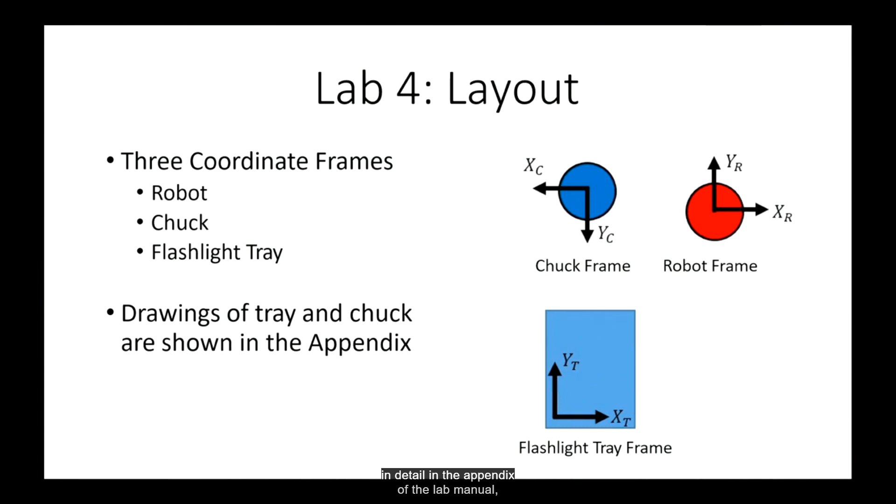So there are 3 different coordinate frames used for the lab: the robot, the chuck, and the flashlight tray. And this information will be more in detail in the appendix of the lab manual, which is going to be uploaded to Canvas shortly.

So this is just a suggested order for how you go about assembling the flashlight. You don't necessarily need to follow this order, but this will give you a good idea of what we found is the best sort of set of operations to assemble it. So you need to grab that flashlight head, put it in the chuck, close the chuck, and then you're going to be threading on the main body of the flashlight. You're going to be putting the battery assembly within that main body, and then you're going to be putting the cap to the flashlight and threading that on.

Now, we are using a new command in this lab, which is Tighten Torque. It's a function that uses the gripper we used in the last lab to tell how much torque is being exerted when you're threading your flashlight. So that can be a little finicky to get working, so taking the time to try to figure that out and get it working is going to be important. But that'll ensure that you've tightened everything properly without over-tightening it.

So the grading is going to be done taking into consideration a couple different things. Creativity is an important one. You're going to have the opportunity to make some kind of creative addition that'll allow your robot to function a little bit better or faster, or just improve the assembly process. And we're intentionally a little bit vague about what we want to see for that, because we want to give you guys a chance to really come up with your own ideas and creative things.

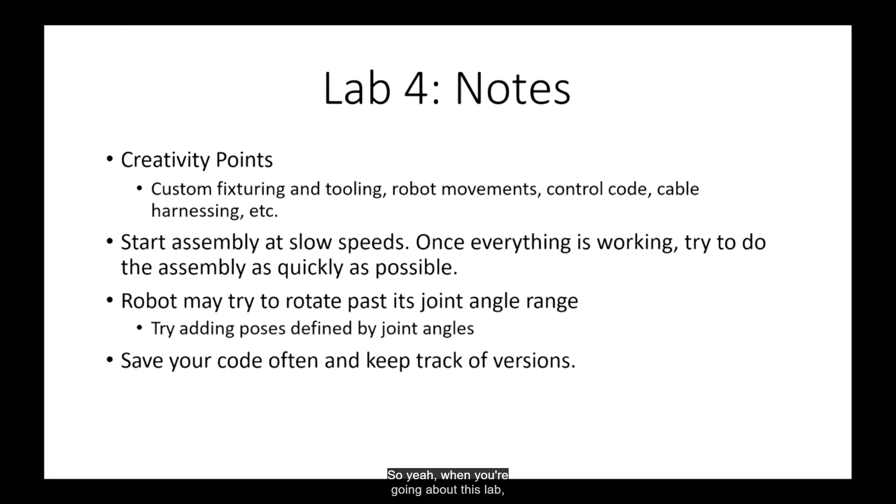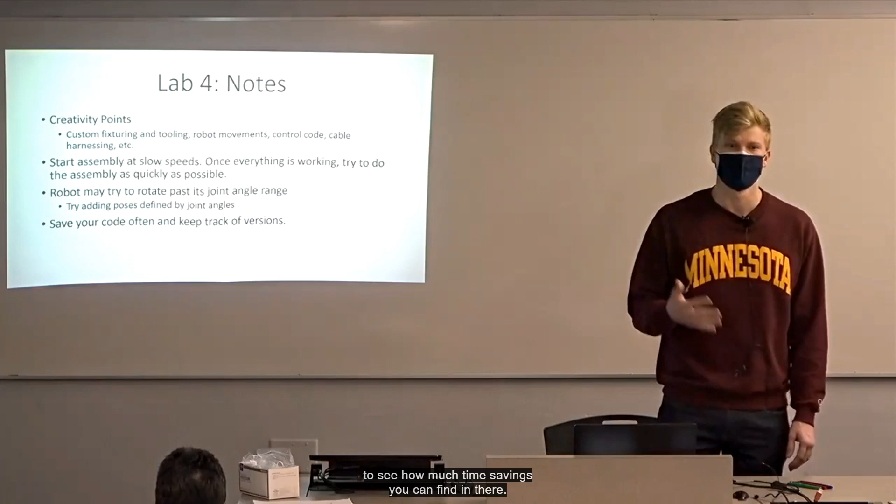So when you're going about this lab, what you want to do is break it up. The first thing you need to do is start assembling at slow speed. This will give you a chance to make sure that your full assembly is working before you start trying to speed it up and get it within certain time frames, because another consideration for grading is going to be how long your assembly takes. We're going to have a few different time breakpoints and points associated with that. So it's going to be important that you guys iterate through the code and try to see how much time savings you can find in there.

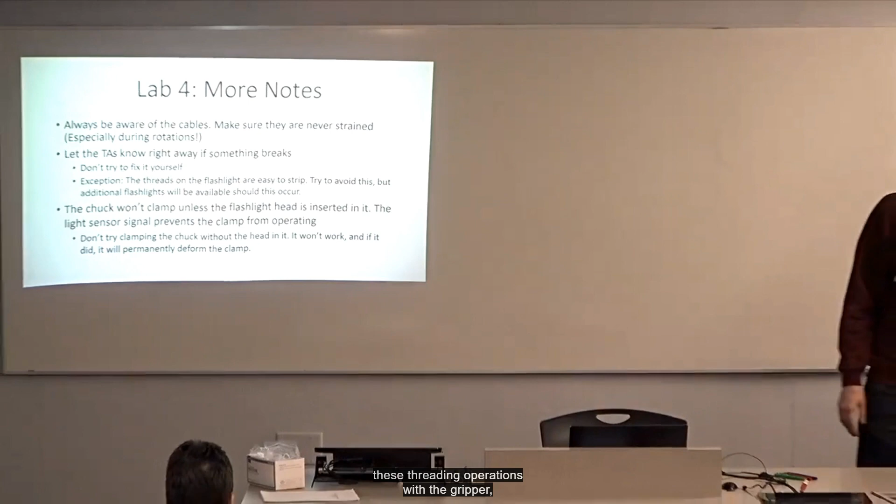So a couple more notes. Be aware of the cables, especially since we're doing these threading operations with the gripper. You need to make sure that you don't over-rotate the gripper and strain the cables that are attached to it.

And let us know as TAs right away if something breaks. The one exception being the flashlights themselves. It's really easy to strip the threads on them, so if that happens, we're going to have additional flashlights available for you guys to use and abuse. So that's good, but if anything else breaks, please just let us know and we'll come fix it, okay?

Another note is that the pneumatic chuck that I was talking about earlier, that's what actually clamps and holds your flashlight assembly in place during assembly. And it's impossible to actually close the chuck without the head inserted into there, because if it did, it would break the chuck. So we have a light sensor to identify if the flashlight head is actually in the chuck. I think there's a picture later in this presentation, so I can show you what I'm talking about.

Okay, so as talked about earlier, two big considerations in grading, outside of just actually having the flashlight assembly working, is going to be making sure that you do it as quickly as possible and try to hit the time targets that we're going to be setting for you guys. And then having creative additions is going to be important.

So, as I said earlier, focus on getting the flashlight assembled however long it takes, and then just slowly iterate through and try to cut time and improve the program.

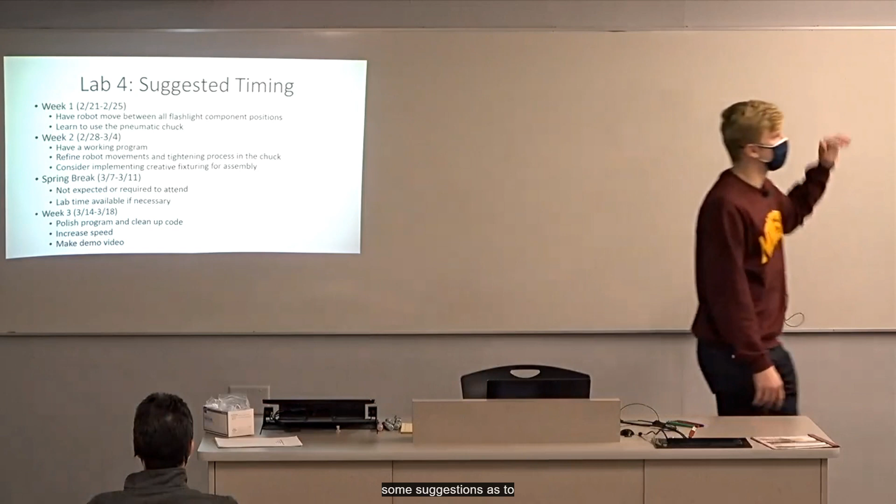So with that, we broke down some suggestions for you as to checking your progress week by week. Week one, you want to have your pre-lab coded and everything going, and then just try to get your program working as best as you can. Make sure that you have all of your coordinates updated and it's moving to the correct locations at the correct time. And start playing with the pneumatic chuck and the torque thread operations to really make sure you understand and can figure out how to use those.

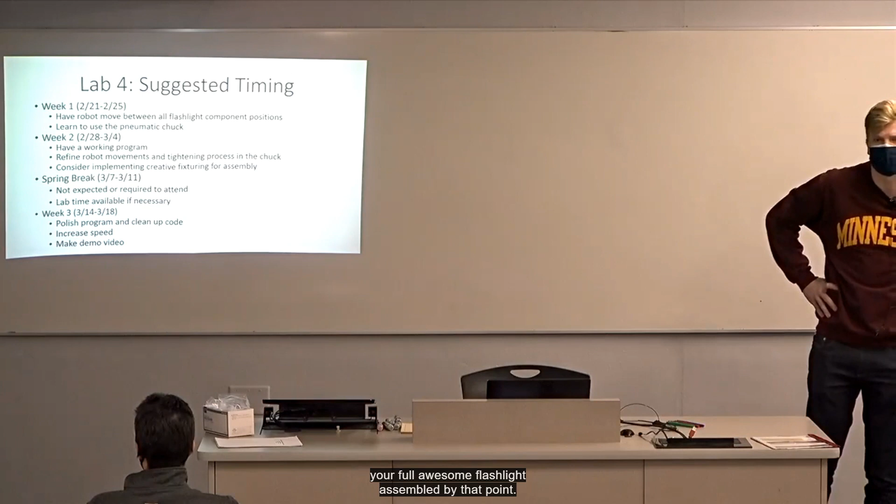Then week two, you should really try to have your full flashlight assembled by that point, regardless of how long it takes. You should start looking at implementing your creativity ideas at this point too, see what you can do. And if you have some extra time, just try to keep refining your robot movements.

As said before, spring break, there's no required lab, but the lab will be open if anyone needs that additional time. And then week three is when you're going to want to really take the time to implement your creative additions, refine the process, increase speed as much as possible, and then take a little bit of time to make your demo videos, because we are going to be requesting that you submit a full video of the flashlight assembly.

And I actually have that video here. So this is a video of my robot from last year assembling the flashlight.

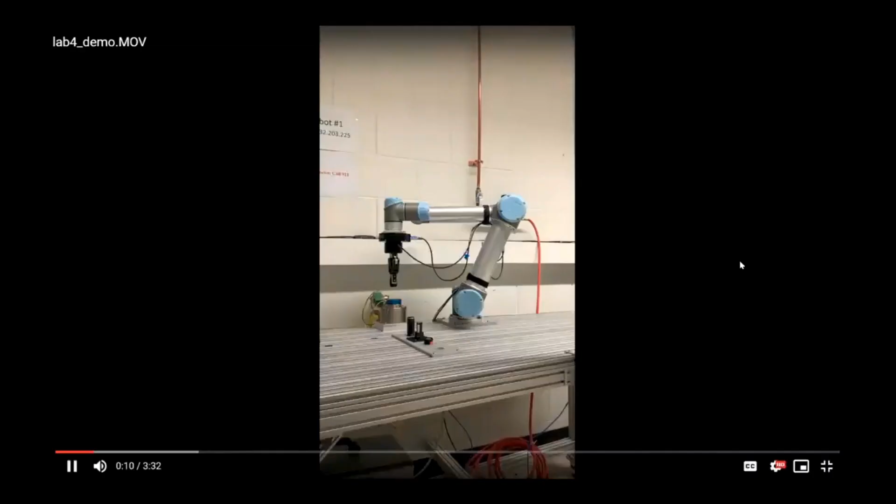So the video starts at the move home operation. It's where the time begins. This is as soon as you hit that move home.

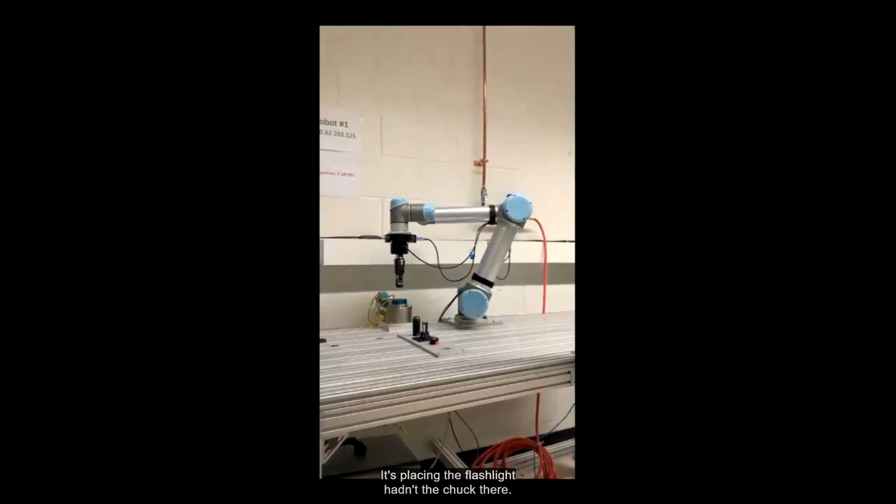It's placing the flashlight head in the chuck there. And then it closes the chuck now that the chuck realizes that there is something in there. Now we're grabbing the body and we're going to begin the threading operation for putting the body on the flashlight head.

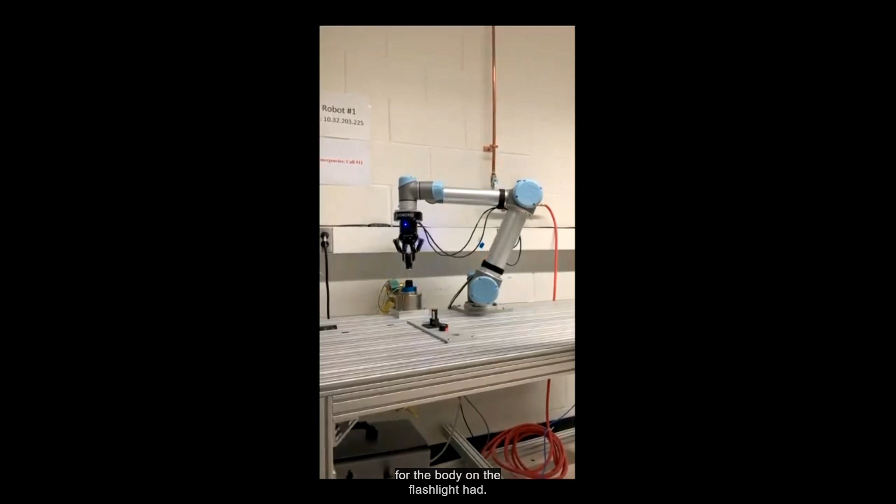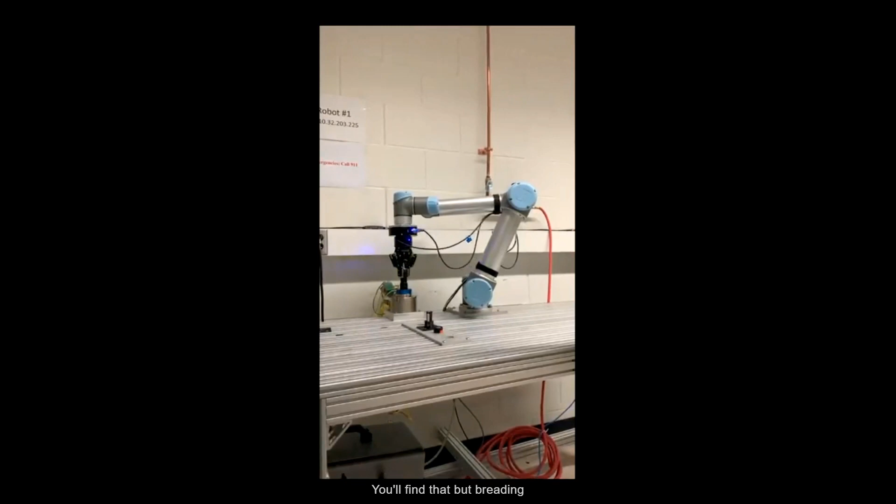You'll find that the threading operation takes quite a while.

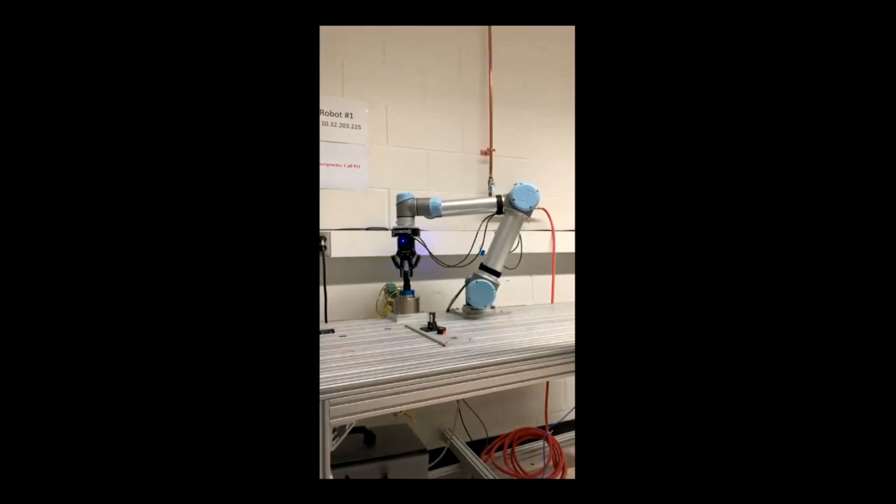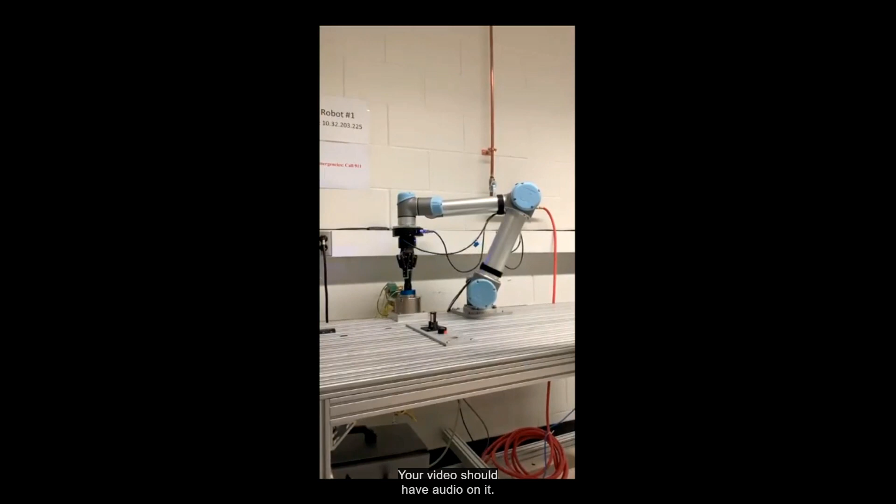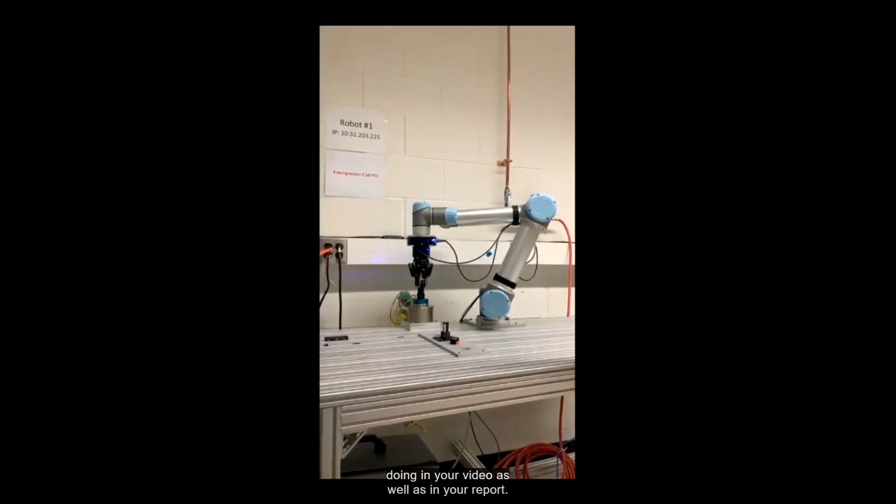Your video should have audio on it, and you should describe what is unique about what you're doing in your video, as well as in your report.

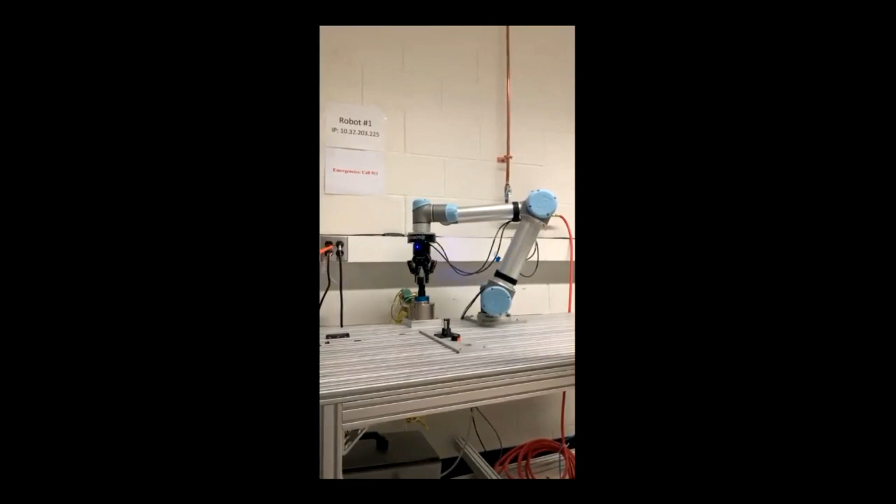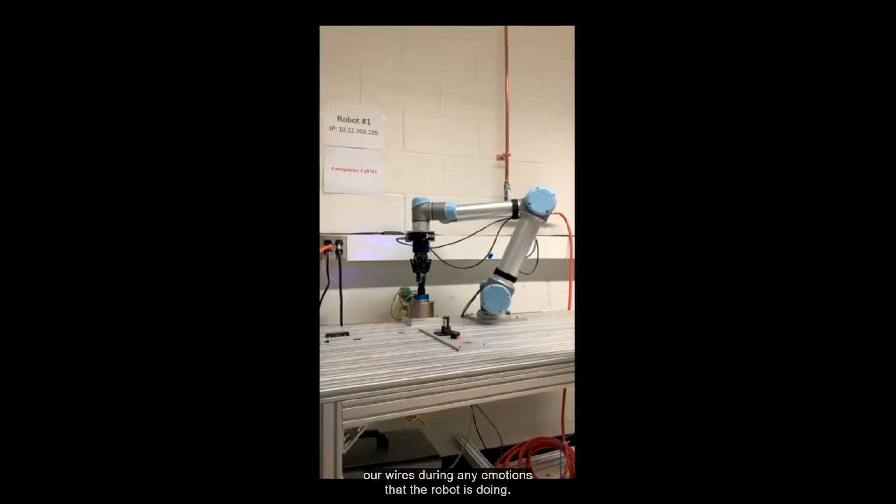Notice the dangling wires. You need to be very careful about not pulling out wires during any motions that the robot is doing. Yeah, that's why when you're threading, you need to turn it part of the way, then back it up and turn it part of the way. You can't just keep it rotating because of those wires.

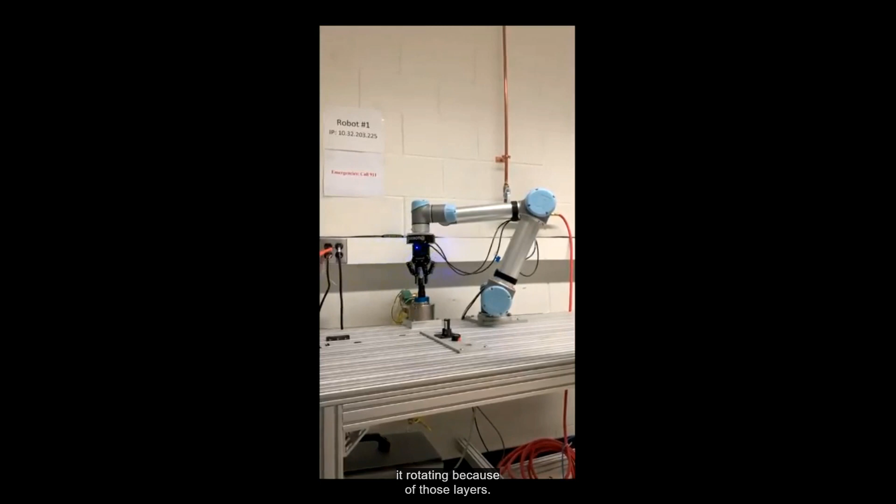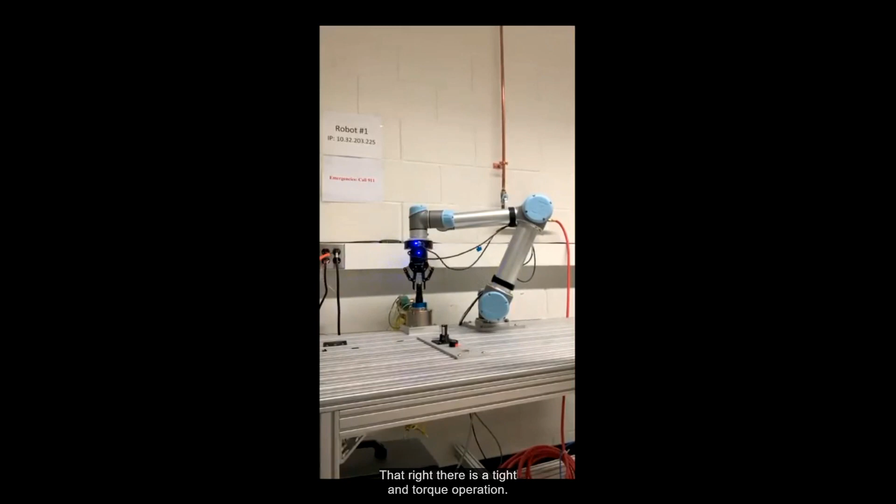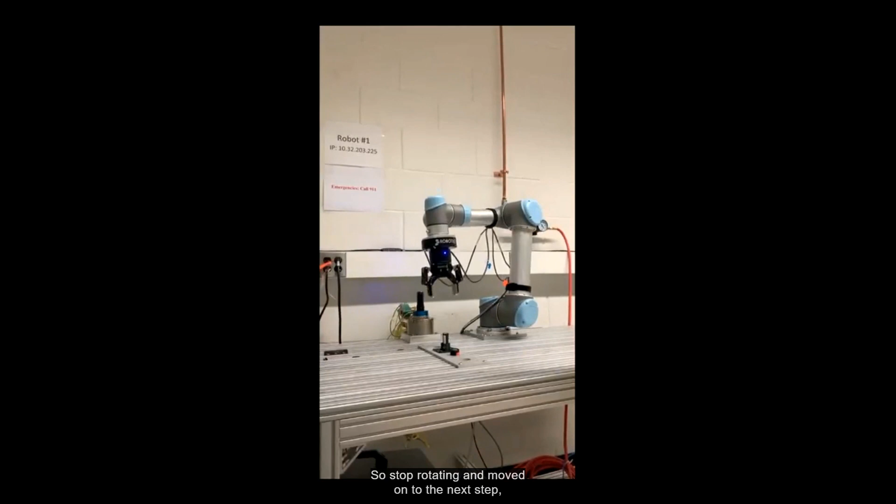That right there is a tighten and torque operation. So it found that it made it to the specified torque of 3 newton-meters, so it stopped rotating and moved on to the next step, which is inserting the battery assembly into the flashlight.

And then the final piece is the cap, which is another threading operation.

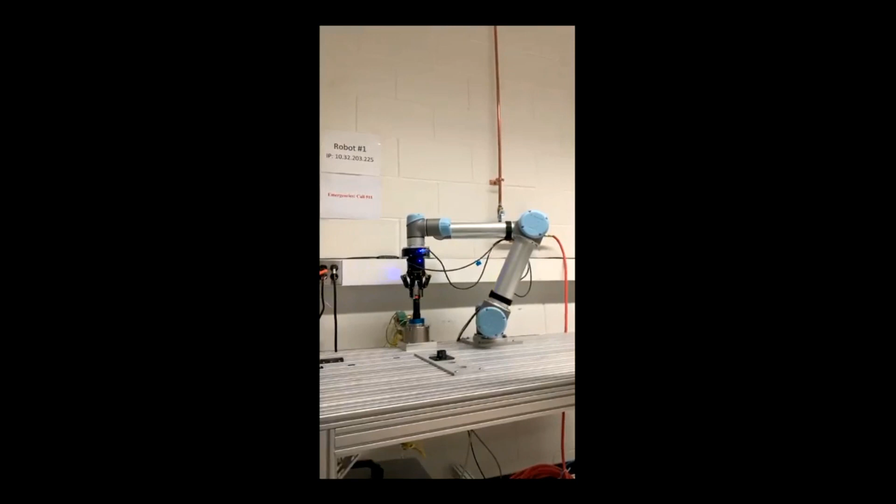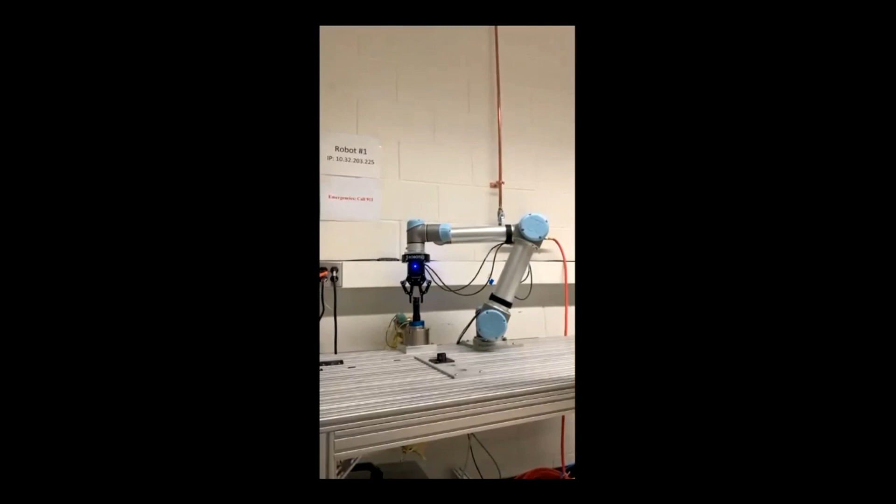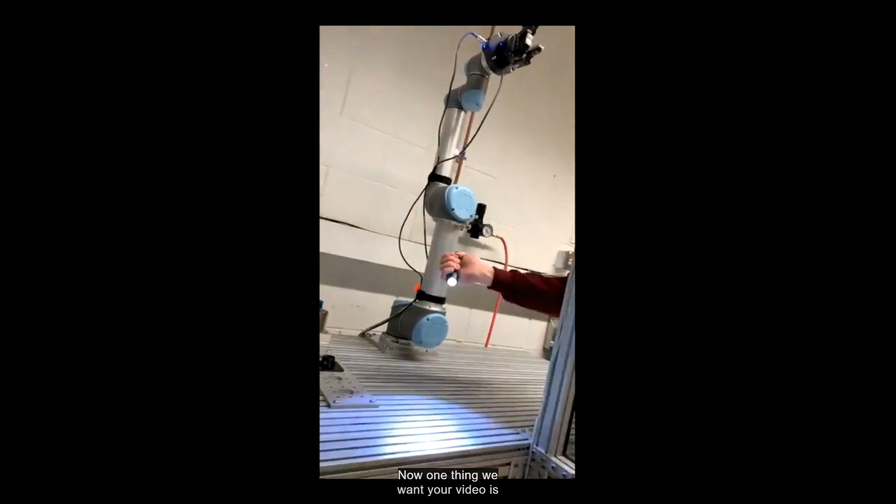Now the assembly is complete, and it moves home, and timing stops. Now one thing we want in your video is you demonstrating that the flashlight still works and is functional, and that you didn't break anything in the process.

As we just disassembling it to show that, hey, I didn't strip the threads, the flashlight is still there.

So deliverables: we want a full lab report. In the past you've been doing memos, but this will require a full lab report - abstract, introduction, methods, results, discussion, and conclusion. I believe we have a template or a guide available so you understand the requirements for a full lab report. We need to make sure we're identifying what the unique contributions are, both in the report and, as Dr. Donath mentioned, during your video of the flashlight assembly.

And then in the lab manual, similar to previous labs, there's going to be a number of questions that we're asking you guys to answer.

Now, put all of that in a zip file, upload it to Canvas: PDF of your lab report, all your robot files - that's going to be your RoboDK file, your Python, that sort of thing. And then, as I showed you, a video of the assembly with commentary describing what the robot is doing and what the unique or creative aspects of your assembly are.

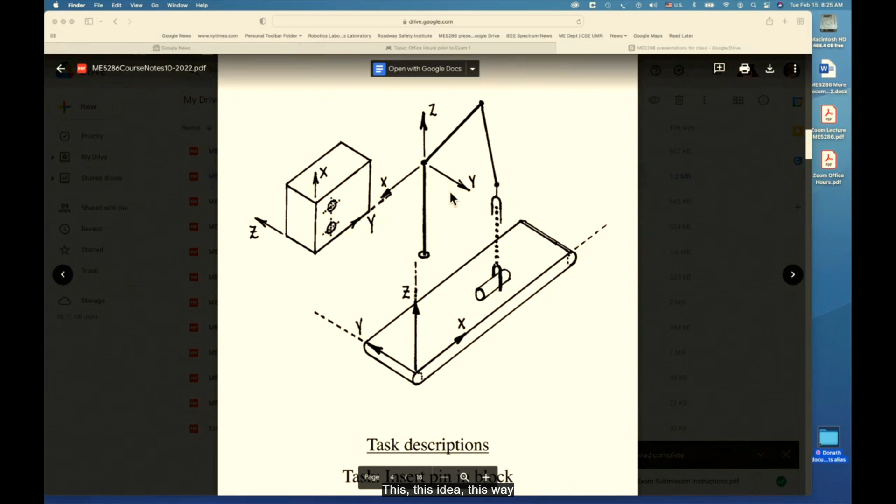This idea, this way of breaking up the task into steps and homogeneous transformation matrices, becomes very important. And it doesn't matter which robot you're using - they may call the position and orientation a pose, they may call it a target. There's all sorts of different nomenclature, different words used to represent what we're talking about here. So we're going to talk about a task, and the whole point behind this exercise is to set up the equations so that the robot controller can solve them and thereby create a sequence of motions of the robot end effector that will meet the task at hand.

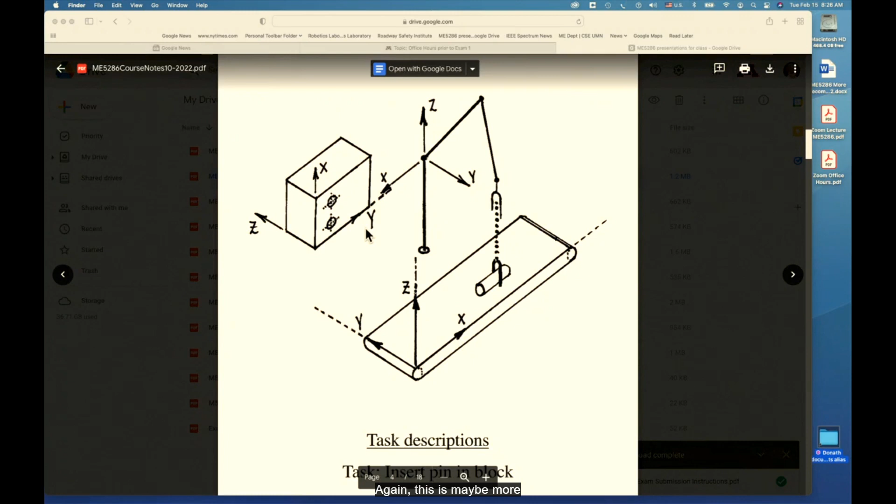So in this particular case, again, nothing magic about a pin, but it happens to be a pin. It's on a work surface, on a table. There's a coordinate frame on the table or the conveyor belt, and essentially there's an end effector. It's going to come down, grab the pin, and then swing it around and move it into a hole which is identified with respect to a block, and they each have different coordinate systems. Again, this is maybe more complicated than some tasks and maybe less complicated, but it's just illustrative.

So we're going to generate what I will admit to you is many more transforms than you may need for a particular task.

The point here is so that you see all the elements and how they come together. We haven't come to that step yet, but we will be able to group certain combinations of homogeneous transformation matrices and give them a name, and you'll see how that name plays a role later on.

The world coordinate system, the base coordinate system, whatever you want to call it, is identified by O or 0. Then there's a homogeneous transformation matrix that points to the coordinate system of the robot, wherever it is. Every robot has its own favorite place for its coordinate system.

T6 is going to be a very important element in all of this. T6 is a 4x4 matrix, and that matrix identifies where the flange of the robot is, where the end is, where you attach end effectors. It tells us where the end is sitting out in space.

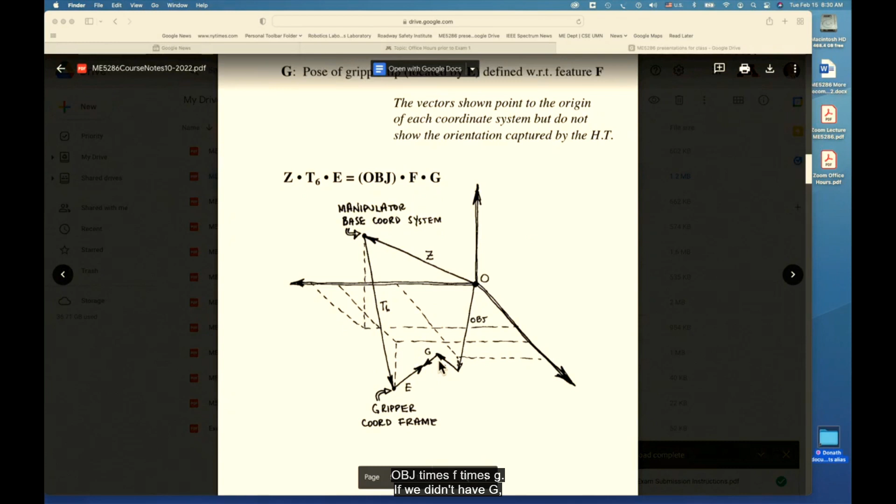So G allows us to form this equation that says that each of these is a 4x4: Z times T6 times E is going to be equal to OBJ times F times G. If we didn't have G, then where on the feature would we be attaching? Where would we be pointing with this E?

So let's now put some more specificity into this definition. We're talking about moving to a position over the pin. Let's call that P1. We are approaching the pin from overhead. We've talked about that before.

Then we're going to close our fingers around the pin and lift it vertically from the surface. We're going to move it above a hole with the pin oriented along the hole, and then insert it, sliding it into the hole. We'll let go of the pin, and then move the gripper away from the pin. That's essentially the sequence of tasks we're going to go through right now.

So we're going to have to define a whole bunch of homogeneous transformation matrices. One is the pin's coordinate frame—I'm basically reviewing what I talked about the other day. P is the pose of the pin in the base coordinate frame. B is the block's coordinate frame, again in the base, the O coordinate frame.

There's going to be the hole. There may be 10 holes, 4 holes. So this is going to be the ith hole with respect to the block.

PG is what we're going to spend some time talking about, and it's going to be defined by E. This is essentially the approach above the pin when we first arrive. PD is a departure above the pin. This is an approach above the hole where it's aligned with the hole, and then we push it in—that's the pose of the inserted pin.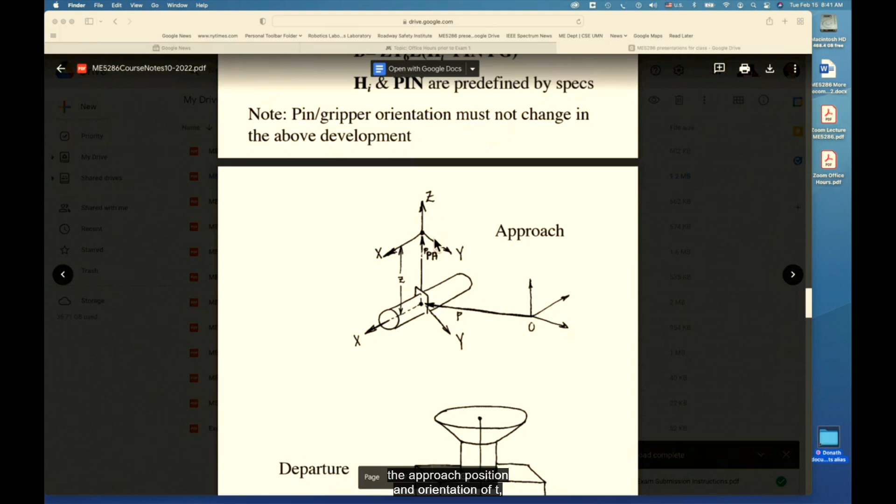So again, assuming that PA is going to be a position above P, very simple definition. It's just an identity matrix because it's just offset from the original P by a distance Z, which you can see in this diagram. Here is P. Here is x, y, z associated with P from the base coordinate system. And just going straight up by whatever distance Z, we're going to define the approach position. Keep in mind it's a pose. It's the approach position and orientation of PA.

Okay, so this PA is just offset by Z. So this is a very simple homogeneous transformation matrix. We're not asking for any change in orientation. We're simply applying an offset in the Z direction. If you want a departure point, which is often Never Never Land, if you don't want PA and PD to be the same, and you have some reason that PD should be something different, you can just set up your equation again. ZT6E, again, is the product of three homogeneous transformation matrices.

It's going to be equal to P times the departure position, which is relative to P, times PG. And all we have to then do is pre-multiply both sides by the inverse of P and post-multiply both sides by the inverse of PG. That's what you see over here. And that will get us to calculate PD. So again, once you've moved it around to where you want it, you can capture what PD should be.

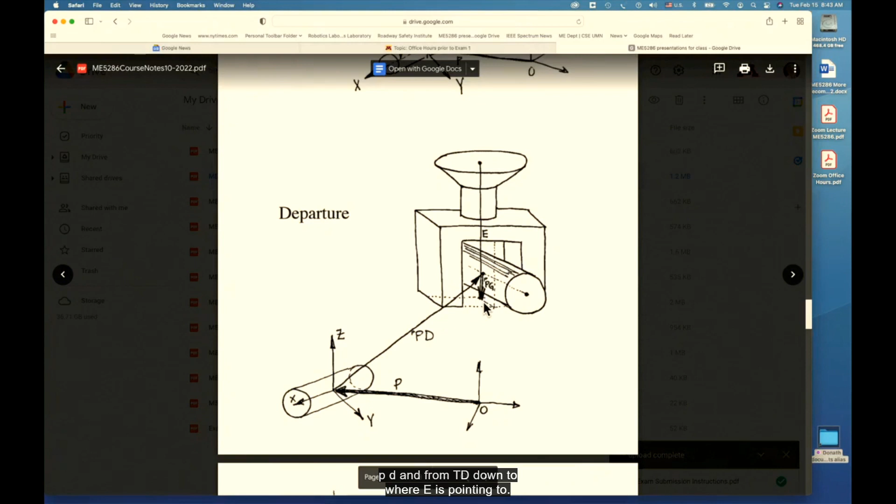And if we look at the diagram, here's the gripper, here's E, and some arbitrary place that you want that pin to go to after it's been on the table, was defined as PD relative to P. But then notice here is E, which is attached to the gripper, and that points down to here. So here we have E, which is attached to the robot itself, and PG is basically, think of it as closing the loop. It points to the position and orientation of this point, but relative to P. So we're going from P to PD, and from PD down to where E is pointing to. So there's an orientation and a position at this particular location.

It can get more complicated because as soon as we have a block B, where is B in this world? And then I'm just going through the steps so you get some sense of how this all plays together. If there was a block and there's a hole with respect to the block, so H is with respect to B, and then there's some insertion point inside the block, which is relative to the hole. And then we still have a PG to close the loop with that E over there so that PIN and E are essentially closed up.

So to calculate B, we're going to post-multiply ZT6E by the inverse of H sub I multiplied by PIN, that's the insertion position relative to the hole, times PG. In other words, we put a bracket in front of HI and after PG, take the inverse of that, then pre-multiply this side and post-multiply this side to get what B is.

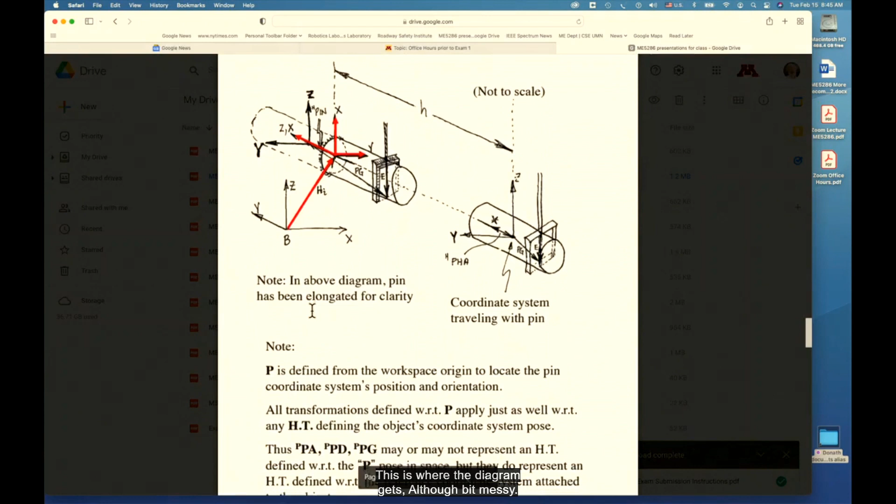So let's take a look. This is where the diagram gets a little bit messy, and again, I'm blowing things up dramatically so you can see the various elements.

We've got the block coordinate system over here, and H is a homogeneous transformation matrix that defines the coordinate system of that particular hole. That's this red - I'm just drawing the orientation, y in this direction, x in this direction, and z in this direction, representing the hole's coordinate system relative to the block.

So again, Z is going - always right-hand rule, you can put your fingers along the X and Y, and Z goes into the hole itself.

And then we have this pin. Initially, if I have a block, just imagine a block on this tabletop, and here's the pin - before I start, I am going to take that pin and manually put the pin into the hole to the right insertion point, and then bring the pin down and grab it where I expect to be holding it. So now I know where it's ultimately going to end up inside the block.

So essentially what we're going to see, notice PIN with respect to the hole - that's essentially how deep I'm going to be inserting the pin with respect to the coordinate frame of the hole. Notice that the XY plane is on the surface of the block, and PIN is going to basically just be a certain depth into the hole with respect to the XY plane.

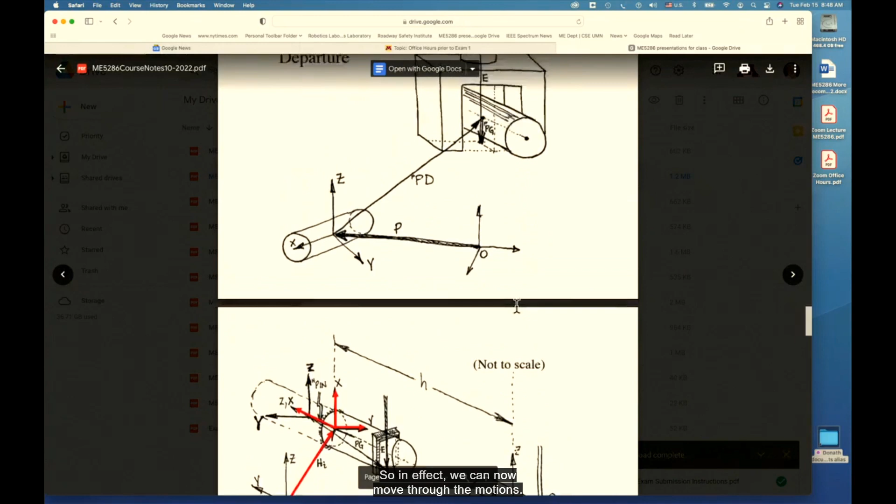So in effect, we can now move through the motions. Once we have this set up, we can essentially work our way, given all the appropriate approach points of PA with respect to the pin, PD, PG, but we also have now the PHA and PIN that we add to the mix.

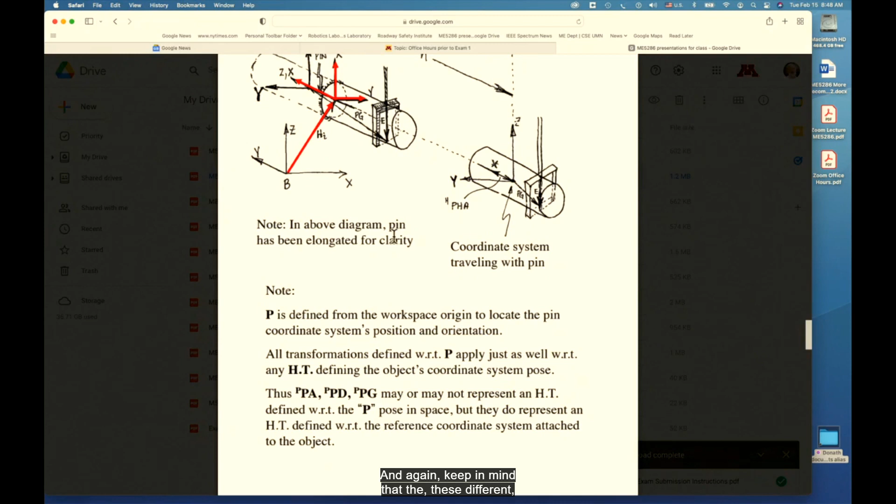And again, keep in mind that these different A's, B's, H sub i's are homogeneous transformation matrices. They are not just vectors, and so I'm not drawing all the coordinate frames you see here.

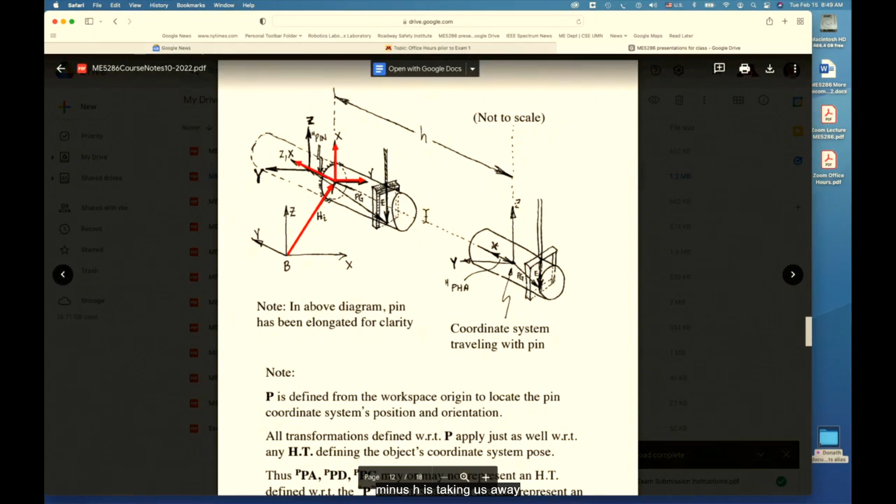So PHA is defined over here, and there's the minus H. That means it's offset from the hole. Remember, PHA is with respect to the hole by minus H. So we're going minus H because Z is going into the hole - minus H is taking us away from the axis of that particular hole.

So this is the task, and whoa, you're going to see all these matrices coming up. We're going to group some of these matrices soon, and they play a very important part in your typical program for writing out a program internal to the robot controller. You as the user of the robot are never going to see this - it's captured in the syntax and on the tablet that controls the robot, or the code that you're writing. You won't see all this detail, but I'm writing it out so you see the steps that have to be captured inside the robot controller.

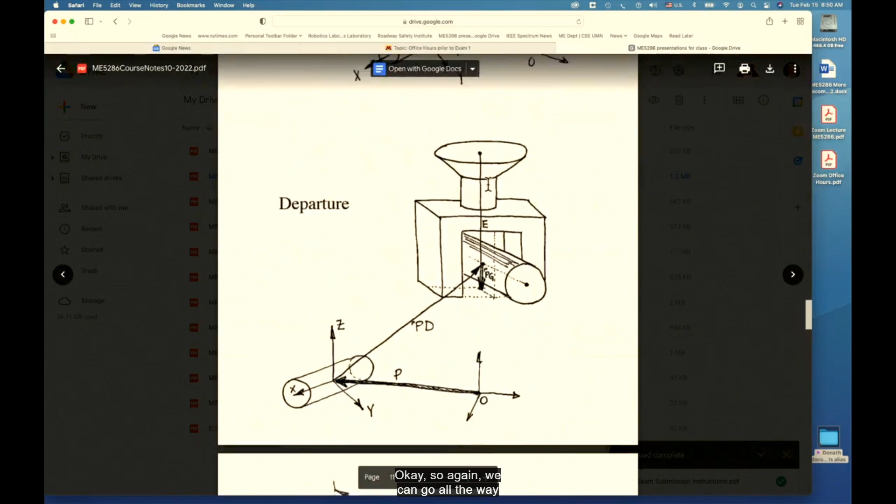So remember, the first position, we're really moving to the approach point above the pin. Okay, so again, we can go all the way back to show all the closures going on.

We're going back to all these steps, and we're capturing now all these parameters that we've introduced. But this time we're laying it out step by step. So now this is where we move to pin P1, which is at the approach position and orientation above the pin.

Now we're going to essentially move down to the pin's coordinate frame, which is sitting on the table. We close our fingers around the pin, then move away from the tabletop to a departure position, again somewhere above the surface of the table. Then we rotate around to a new position, which is the approach position and orientation above the hole, with respect to the block.

And again, PG and E inverse travel along with it, because otherwise we don't have an equation. Then we're going to insert the pin. We move into the block to PIN, the homogeneous transformation matrix inside the block, which is defined with respect to H, which is defined with respect to the block. Then we let go.

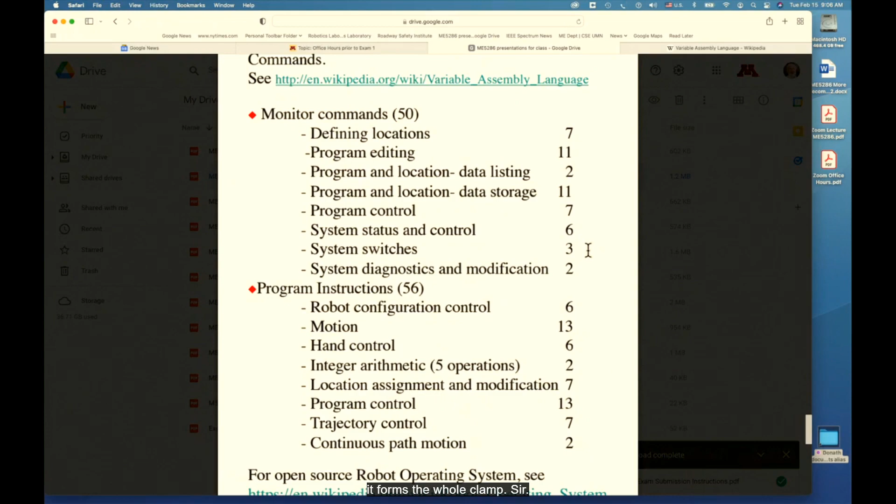For example, in the assembly of that flashlight, you really want to make sure that you don't clamp on the flashlight head unless there is something inside there, because I can't tell you how many clamps we destroyed, since if it doesn't have something to clamp on, it deforms the whole clamp. I had a previous teaching assistant, going back 3 years ago, who bought an LED photosensor, drilled a hole on the side of the clamp, inserted this LED photodetector, and designed a program so if there's nothing in it, that LED will prevent the clamp from turning on. There are solenoid valves that have to turn on in a certain sequence, and if that LED doesn't detect the presence of something blocking the light, it won't allow the clamp to close, so the appropriate solenoid valves are triggered.

So that might be something called system status and control, system switches to turn things on and off. And there needs to be a way of diagnostics to know, hey, what was going on here? Can I actually see what each motor was doing, or what each joint is doing? What was the joint velocity here or there? Today we have a wealth of opportunities to evaluate and test because you are writing the Python program that's doing a lot of this.

You are not using the raw commands on the teach pendant of the UR5, which I don't find to be a really good human interface for programming robots, to be honest. But the bottom line is it represents one mechanism, one approach to how users of the UR5 use the teach pendant to set up a series of targets, and they basically go from target to target.

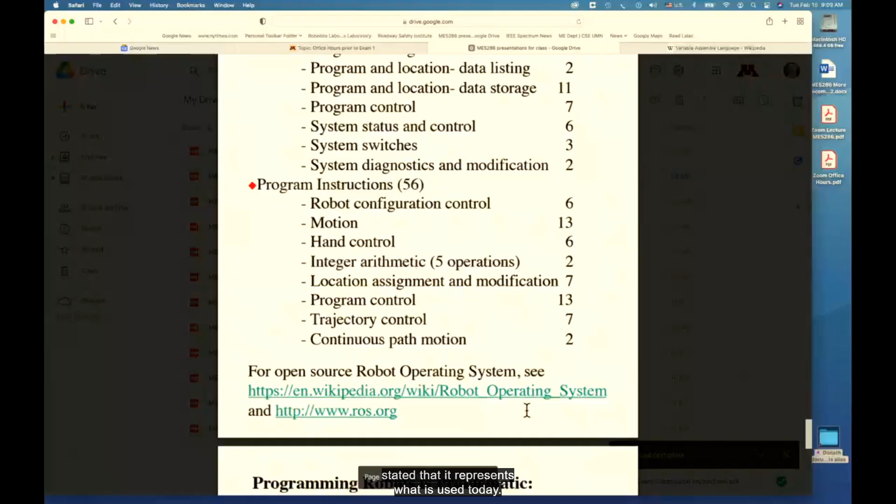Again, I don't want to go through all these different steps. You're not going to use this robot ever, so there's no point. But in this world today, probably, should I say it's the state of the art? It represents what is used today.

The robot operating system is a generic system for programming robots. Because it is so broad and so wide, it has so many things in it. It takes forever to really get a good handle on it.

It's been around for a while. Originally developed by Willow Garage, which is a company that doesn't exist anymore. I don't want to go into all the details, but it's stored in GitHub. GitHub, how many people—all of you should have heard of GitHub by now—essentially a classic place to put stuff which can stay theoretically forever, who knows.

But the point is, ROS is one environment, but it is so big and so monstrous it takes forever to really figure it out. So you need to be very careful about using ROS, and you really need to understand it to take advantage of it, because the neat thing about ROS is there's code that you can reuse. If you find code in ROS, it's open source, you can take advantage of it and use that piece of code for your particular application or development. So you have to understand its purpose, really, so you don't have to reinvent the wheel all the time.

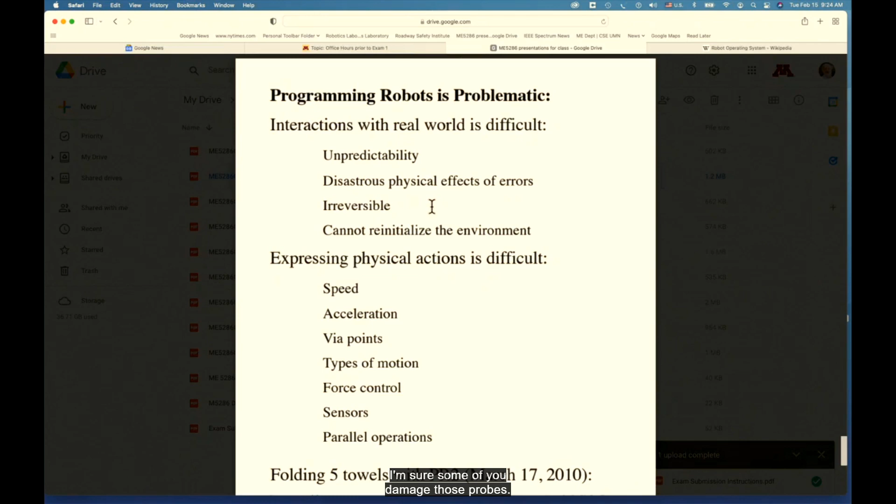I'm sure some of you damaged those probes in some sense. I don't know, but I can guess it happens. In our world, we've designed it so we can replace the probes, but there may be parts of the robot that aren't replaceable or can't go back to the pristine shape they were in before. These are all issues when you're dealing with the real world that don't exist in a simulation.

In a simulation, you can reset all your initial conditions to zero, and boom, you can start again. In the real world, that doesn't happen. We need to take into account the speed, how fast things are moving, their acceleration. We're going to have to create via points.

I'm sure when you start working with the UR5 for assembling that flashlight, depending on where the robot end effector is, you might have to add some via points because of the singularities of the UR5. As you saw a few lectures back, it has some really unusual singularities, unusual in the intuitive sense. You really have to look at that robot carefully to figure out where those singularities are.

Intuitively, you wouldn't guess you were running into a singularity until you try it, and then you'll have to go back and ask why it got stuck there. I didn't expect it to get stuck there. So you're going to have to think, maybe go back and look at those singularities in the lecture from a few lectures back and say, I better move it here so I can still get the robot to do what I want it to do while it's assembling.

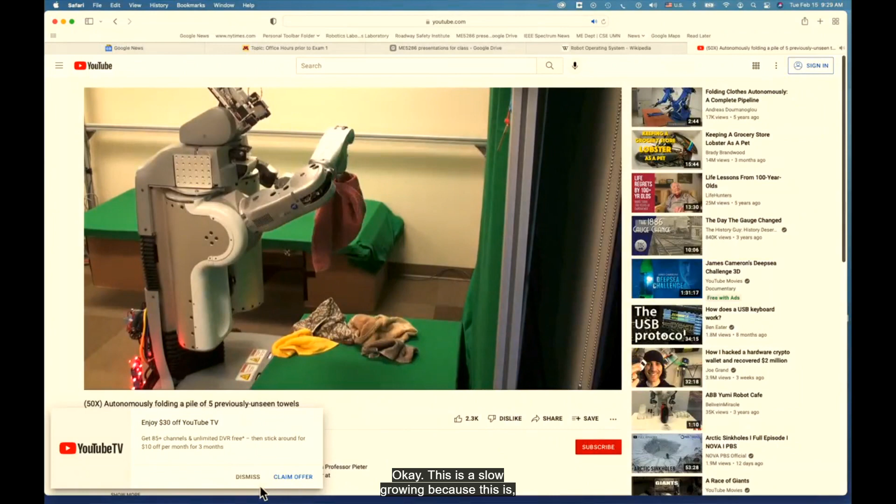There's no ad, good. This is slow going, because this is operating at 50 times the speed. You are seeing something that is happening much faster than it really is occurring.

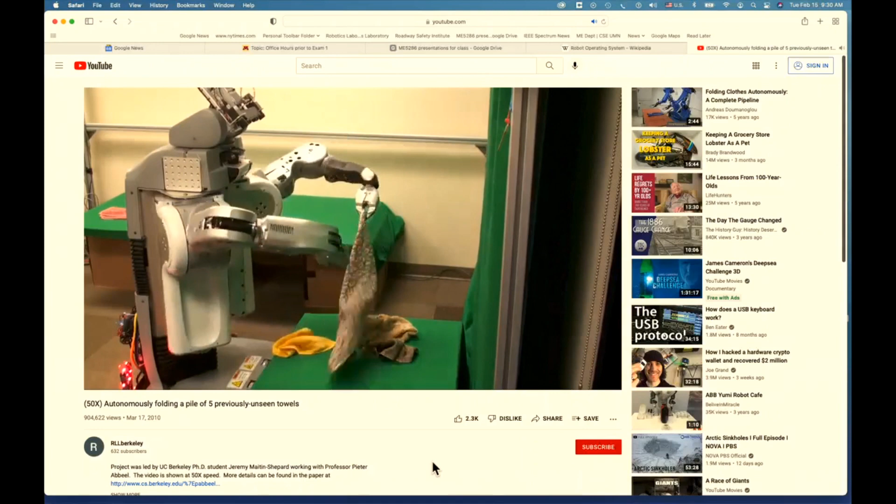What's it doing here? It's figuring out where to grab the towel.

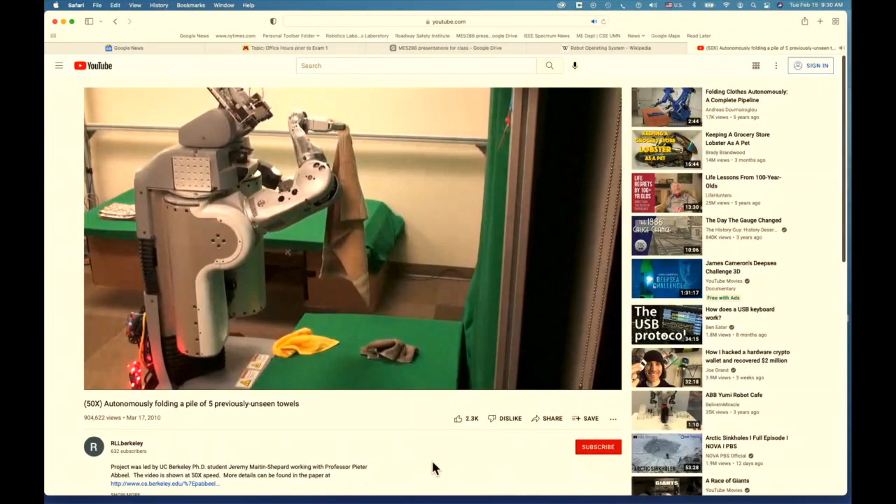Think about the program that goes along with this task of folding laundry. Again, this is accelerated 50 times as fast as it really occurs.

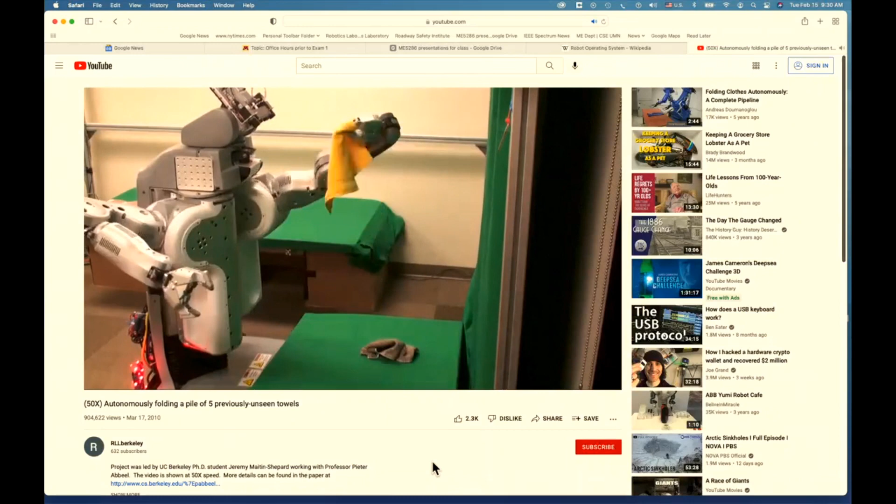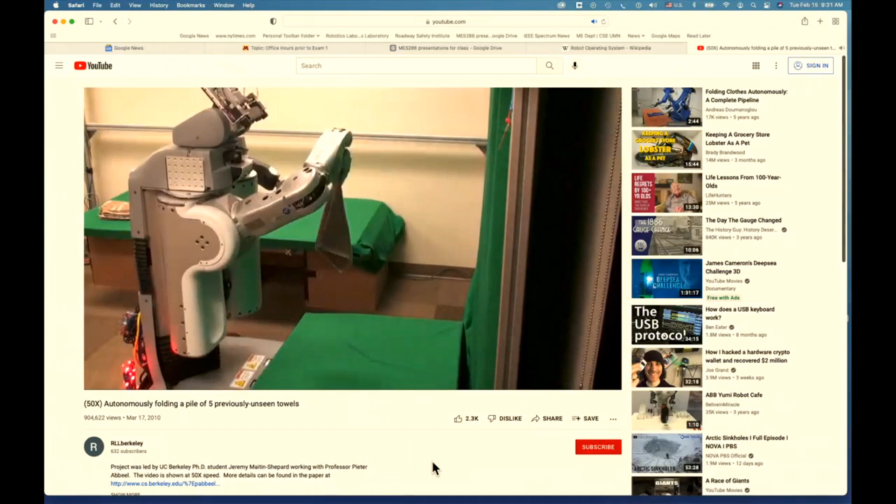Look at the gripper orientations, and how hard do you tug so you don't tear the towel or the face cloth. It never saw these towels before.

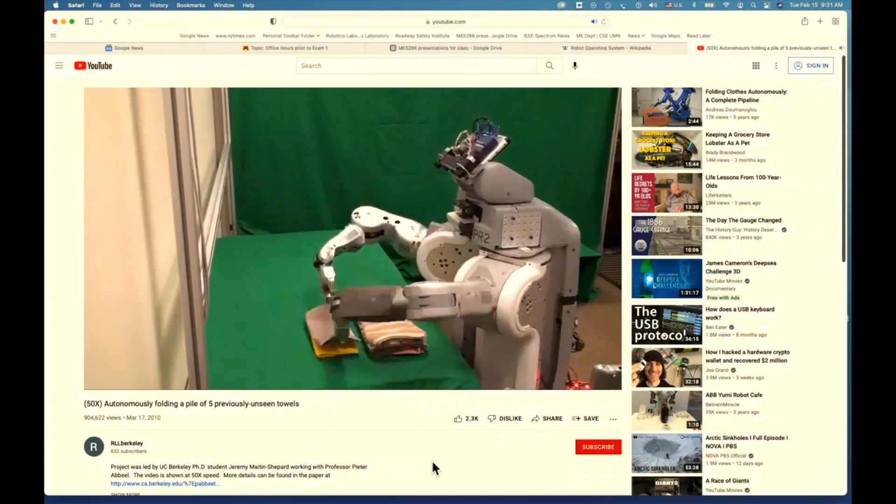Okay, you get it. So let's go back. This particular robot doesn't exist anymore. I do suggest you go look at this website, robots.ieee.org. You can actually see different robots.

If we go to the main website, you can find a lot of old robots by name. I still remember the Ekso, an exoskeletal robot from a company out in Berkeley, California. Robonaut is a NASA robot. I've used several of these for exams over the years.

I'm just looking through, I haven't seen some of these in so many years. This was the original Google self-driving car. AlphaDog was on an exam years ago, so was ANYmal. There's the Atlas robot, the old version and the newer version. This is a good repository of lots and lots of different robots from around the world.

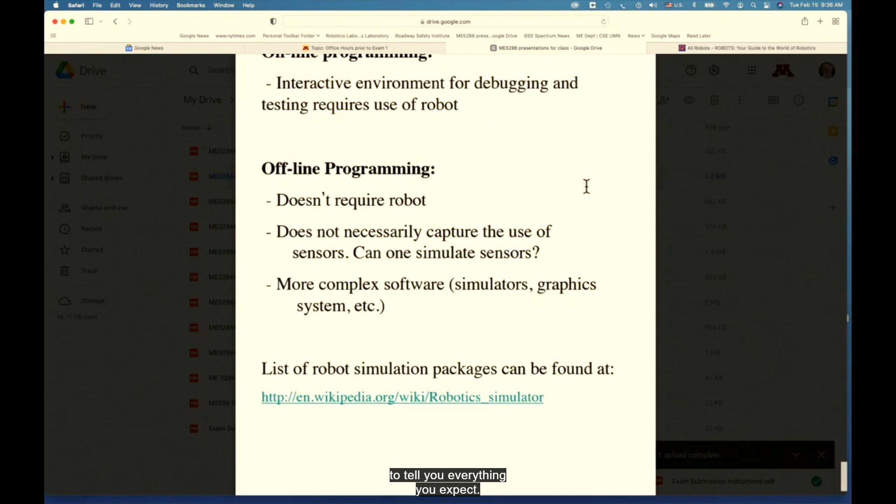And just like robot manufacturers don't want to tell you everything there is to know about the robot, the sensor vendor doesn't want you to know everything there is about the sensor. They want you to know how ideal it is, but they don't want you to know that it has limitations and it's not going to tell you everything you expect. So clearly offline programming requires very sophisticated software in order to do that.

This is a really good website with a list of robot simulators. And if we go down and look, you'll see—let me increase the size of that so you can see it a little bit better. Notice there's RoboDK, your favorite software.

Now it's proprietary. That means you can't use it unless you have a license. We are very fortunate—I was able to negotiate with RoboDK. They're located, by the way, in Montreal, Canada. And for quite a number of years, they've given me free licenses for this class, because they want you guys to use it, love it, and then one day when you work for someone else, tell your boss we need to buy RoboDK.

A few years ago, I asked them who in Minnesota is using it. They weren't allowed to tell me, but they said there is a manufacturer in the state who's using RoboDK, and I'm not allowed to say. I think I know who it is, but I'm sworn to secrecy. The bottom line is it's proprietary. It's not open source at all. You must have a license for it.

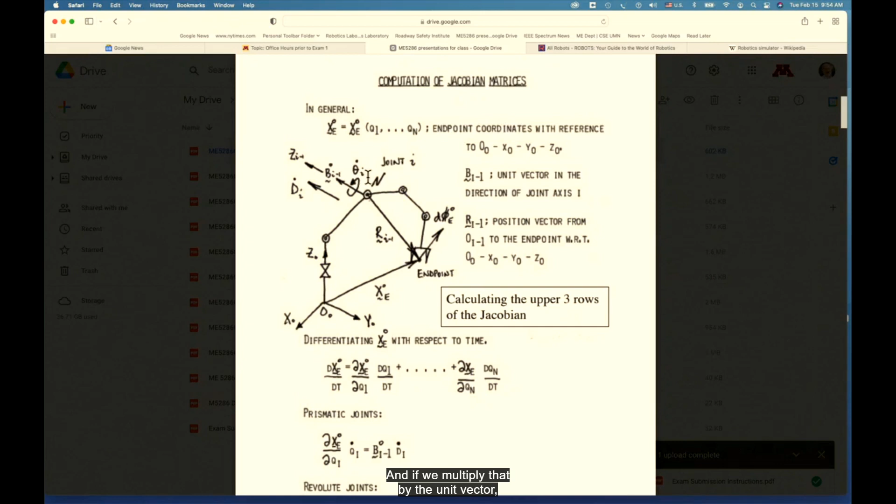So prismatic joints have this form, but a revolute joint has a different form. The angular velocity, remember we said, the scalar value of that joint velocity is theta sub I dot. And if we multiply that by the unit vector, that's going to give us a vector which is the angular velocity vector, simply equal to the scalar theta sub I dot multiplied by the unit vector b sub I minus 1.

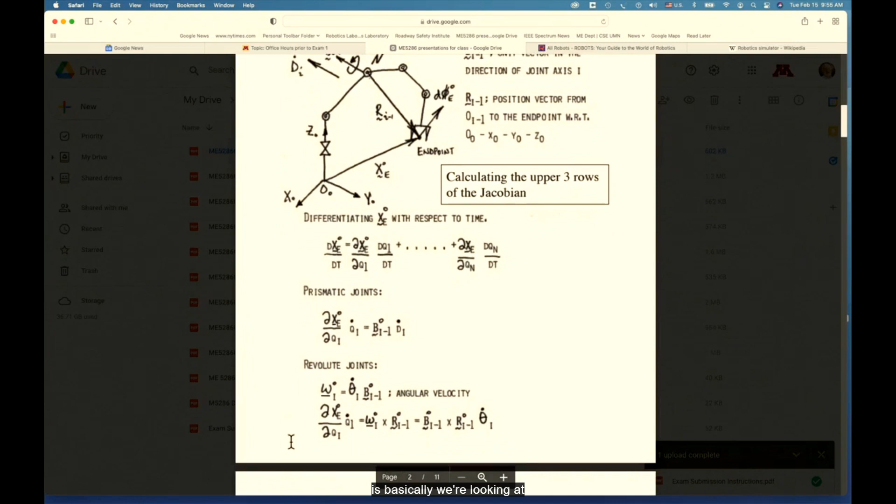That tells us what the angular velocity is, but remember, we want to find out the effect of the angular velocity on the displacement of the end effector. The displacement of the end effector is basically the partial derivative of x sub e with respect to each of the joints multiplied by the joint velocity. And that is going to basically be equal to, notice what we're going to do: we're taking the cross product of r sub I minus 1, that's what this is, with the angular velocity.

So in order to find out the change in the endpoint, the change in x, y, z, we have to take the cross product of the angular velocity, omega sub I, with this vector. It's going to cause this vector to rotate. And when we take the cross product, we are going to get the result that tells us what the three components of x sub e are.

And it's going to be, we can replace omega sub I with this term, so we get that cross product with this term. So this is the result: a unit vector cross product with r sub I minus 1 times the scalar theta dot I.